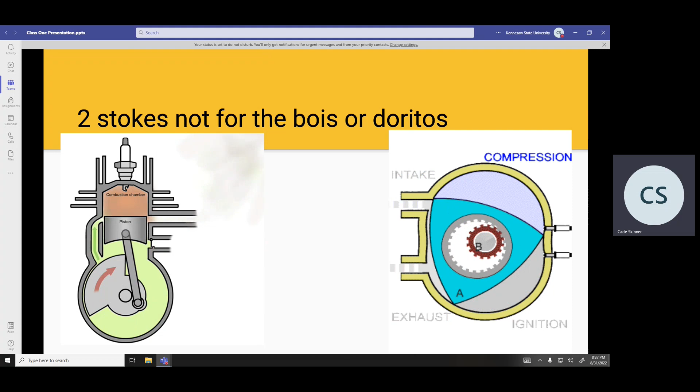They're fun, 2 strokes, they make more torque because they combust more per revolution or per cycle. So yeah, they're a little bit better. Rotaries are fun, it'd be cool to have one in the car, but tough. Apex seals are sucky. Okay, so 4-stroke motor.

I kind of listed things out from general items from the top of the engine to the bottom.

So this is like what the 4-stroke does. We can reference that again, but I'll wait for it to start at 1. So this is the first stroke. It's pulling air in, when the intake opens, it compresses, and then it combusts, sends it down, exhaust opens, and sends it out. Right? That makes sense? Okay.

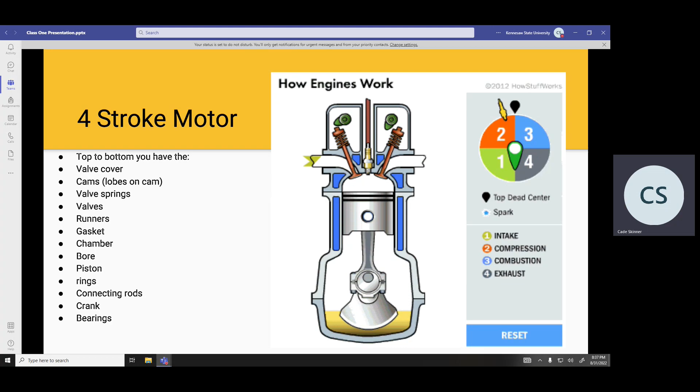So then you have all those components. I listed the slides out in that order, so we can go through all those components.

Cams, that is what opens and closes the valves, exhaust and intake, depending on how your cams are set up. On the R6 specifically, you have 2 cams, 1 for intake and 1 for exhaust. Some engines have just a single cam, LSs are famous for doing that, if you don't know about LSs. And then, yeah, ours will just have 2.

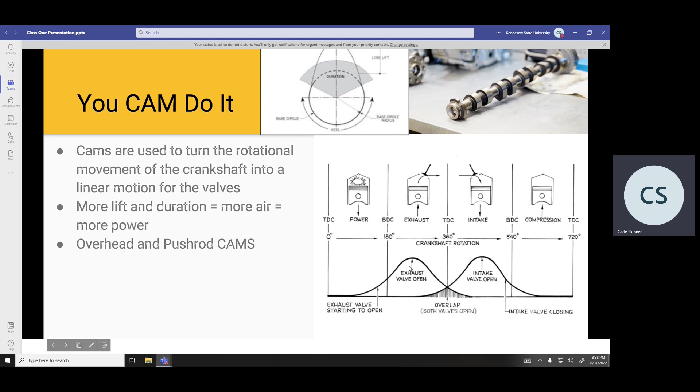Can I minimize this? That'd be sick. Okay, you can see here. So as you do a stroke, I guess I explained it: intake, compression, exhaust. I'll start here, I hope that's not confusing. But...

So you're going down and your intake valve will be open and it'll be pulling air into the system. And then as you get to the bottom of the cylinder, your intake valve will start closing, depending on your timing, and then it'll close, and then you'll start compressing when your piston starts moving up.

And then it'll combust, and then it'll send it down, and then before it gets to the bottom, it'll open your exhaust valve, and then it'll start moving up and exhaust. And then the overlap here, we'll talk about that later in another class.

That's called lobe separation angle, and we'll talk more about how you can utilize that. Actually, that might be in this class. I don't know, maybe. I tried to set the classes up from the previous, so we'll see if I put it in here. But yeah, so that's how cams work. They go to the crankshaft.

Is the motor we have in the car now an interference motor? No, it shouldn't be. If it is, that's bad. I guess I'll explain that. So with an engine, basically if you go to top dead center and you push your valve all the way down and it hits, that's interference.

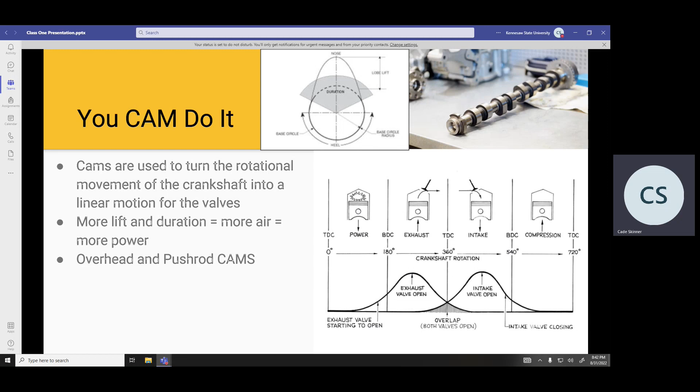Okay, so for the R6 specifically, it actually fires 1, 2, 4, 3. That's going from the clutch side to the stator side. So that's how it would do the cycle, which helps with balancing as well. That's why inline fours are insane. They're really well balanced. But yeah, I think that's all on cams. If anyone has any questions. Okay. As well, y'all can ask more at the end if you have one.

How you do what? Oh, ignition timing. Since we're tuned, we're not distributor. We just do it in software.

So the only thing you would really change your valves or your valve springs for is with a high RPM motor like the R6. With a high RPM motor like the R6, you actually can get valve float, but it is stock and revs really high, so we shouldn't see an issue with that. As well, we don't rev as high as the stock one does because we're restricted.

But yeah, if your springs aren't strong enough, your valve will actually stay open because of the force of the air getting pulled in, and the speed of the cam moving will kind of bounce your spring down, and it'll kind of stay open. So you need to get stronger springs. That's kind of it about valve springs. Sometimes they can become underdamped, I guess is the way you'd describe it if you had vibrations and controls, but y'all don't have that, so I don't know how to describe that in simple terms.

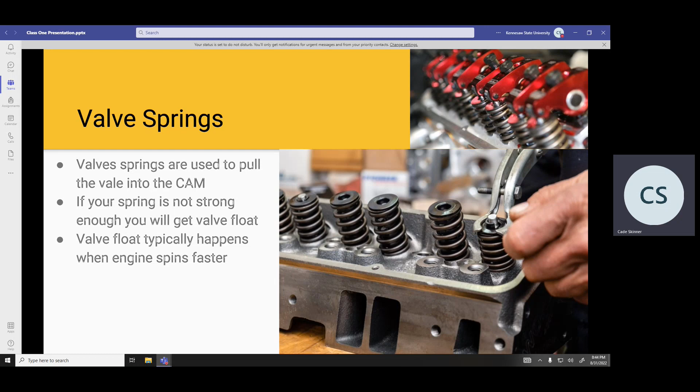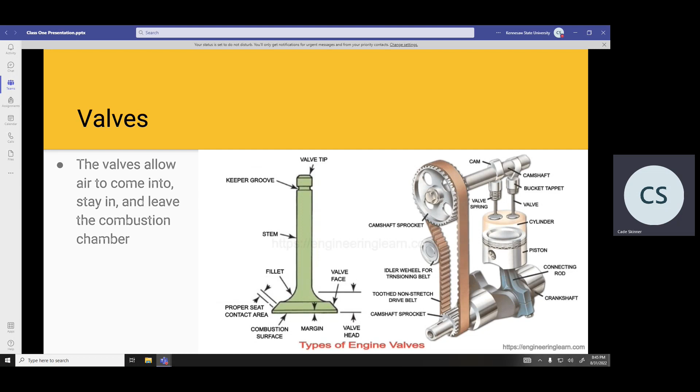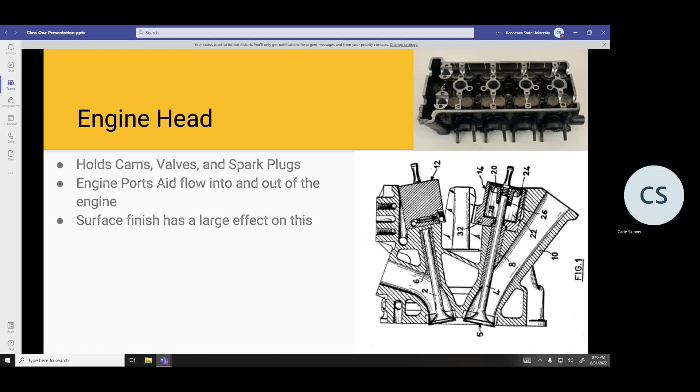Oh, your ports, sometimes you can finish them, you can get them ported is what they call it, ported and polished, and they flow better. It kind of just helps. Part of the stock. Yeah. Head gasket goes in between the head and the block. It just seals it. Make sure your coolant doesn't go in your combustion, and make sure your combustion doesn't go outside of the block. Yeah. Okay, cool.

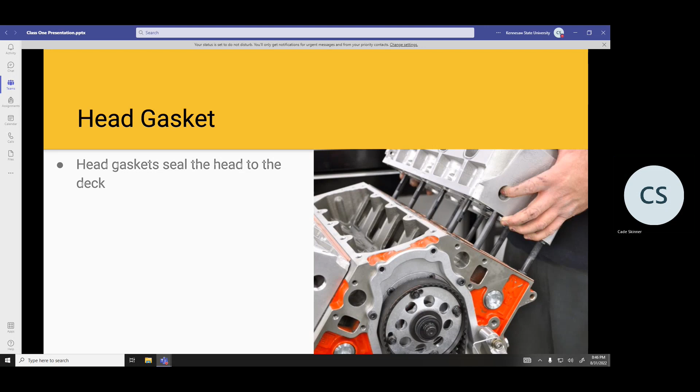Block, so it has your cylinders, or I guess I'll go in order of the slide here. So it has coolant passages and oil passages. So your coolant flows through these little holes here, and they go into the head and just kind of recirculate, and then they exit on the other side.

We'll eventually look at an engine, I assume. I don't know if we're doing that for training. Hey, Mark, for our trainings, are we going to look at an engine? Like, are we going to do an engine teardown or? Okay. All right. Well, I guess I can.

Yeah, your coolant will go through the head, and then it'll go out, exit the engine. Oh, tough. I didn't want to do that. Nice. There we go. Oil, you have all your oil passages. So, like this one, you can have oil go into the filter, and then go out into the engine. R6 is kind of cool. It's got some neat oil passages in there that you can look at. I should put some pictures in here, but it's fine. We'll see it eventually, sometime through classes or trainings.

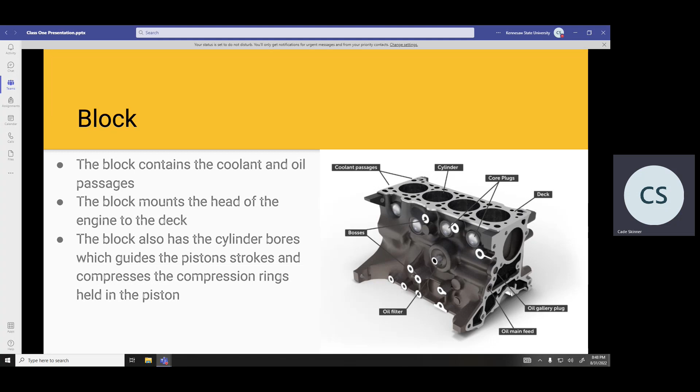And then you have your cylinders. So all of your cylinder bores. This is where your piston travels upwards and downwards. So it keeps your cylinder in there, and it compresses all your rings. So you have your compression rings. That's actually what keeps your compression from going in the block, because your cylinders aren't actually just straight, they kind of taper, so it compresses those rings as it goes towards the top, and then you have gaps in your rings and stuff. I guess if we did an engine building class, that might make more sense, but I don't think we're going to do that.

Piston, so this is the guy that moves up and down. So you have the crown, that's the very top part. So that is what is exposed to the combustion chamber. That has valve recesses, or yeah, valve reliefs like I talked about earlier. So that helps if your valve is going to be open while your piston is at the top, and makes sure it doesn't hit it.

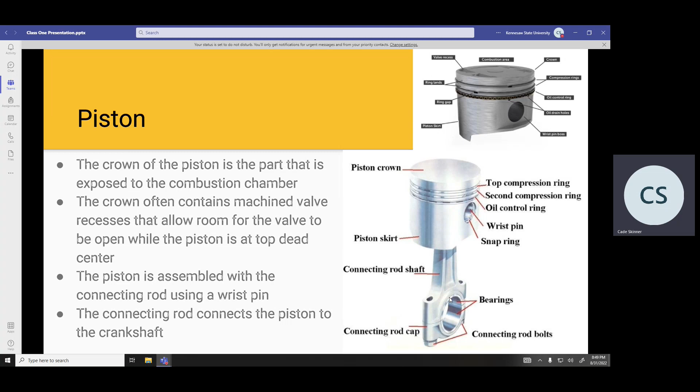And then we have your connecting rod, and that's going to be held in with a wrist pin that goes through this hole, and it has little C-clips that go in and hold it. And then your connecting rod is going to connect to your crankshaft with these little bearings in there. And then here's your crankshaft. So you can see on here that the crankshaft mounts using these ones that are kind of in the middle.

Yeah, so this is similar to the R6. You have 1, 2, 3, 4, and that's how it's actually patterned. So you have your main journals. So those are what attaches to the block, and then that thing can rotate inside of the block.

And then you have your crank pin journals, which are the ones that are kind of offset, and they have counterweights on the opposite side of them. So the connecting rods will actually connect to that, and then the counterweights actually offset the weight of the piston. Okay, does that make sense? And then that sends power to the wheels using the flywheel. Yeah, cool.

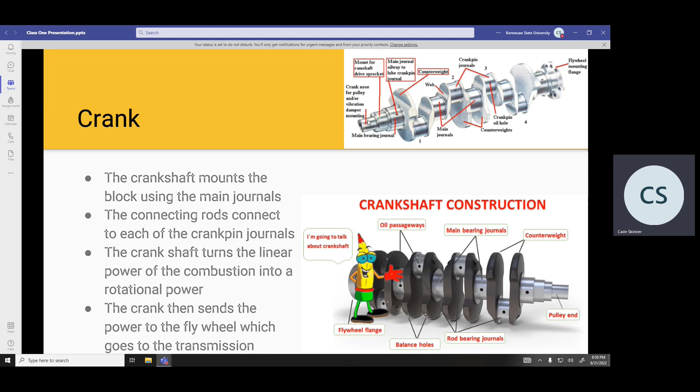Oh, also on this end here, usually you have something there to go to the cam, like a chain or a belt, something along those lines. And then displacement. So you can see how you calculate it here. If you have your stroke and your bore, it's just how you take the volume of the cylinder. It's divided by 4 because they use diameter, and 2 squared is 4. That's how you calculate displacement, and then you multiply by however many pistons you have.

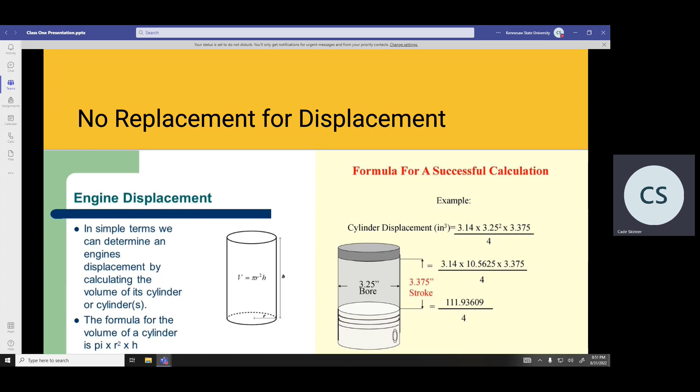Intake, throttle body. So that is what helps distribute your air to each cylinder. For our car, we have to have a 20mm restrictor in line of the intake, so it's right after our throttle body. 19mm if you use E85, and we can use forced induction. We just haven't gone down that avenue yet. If you use forced induction, are you allowed to have a larger intake?

Yeah, so what's interesting about forced induction is your restriction actually has to be before the compressor wheel. So it actually has to pull all of your air through the restrictor. So it has to be pre-turbo. It's like where your air filter goes on a turbo. If you have an air filter. Some people don't, and they're mad.

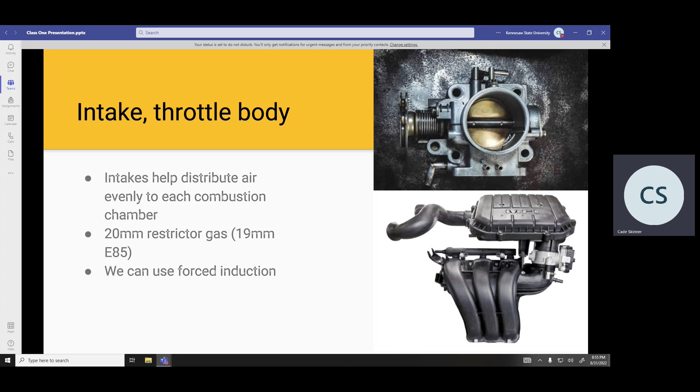Sick. All right, I'll move on.

So then you have your sensors that are in your intake. So you have your MAP, which is manifold air pressure. The MAF is mass airflow. MAP is manifold air pressure. So that actually goes inside of your intake manifold. On ours, it's kind of like that big chunky looking piece. So that would read how much pressure is inside of the plenum. So that'll tell you how much air you are able to get into the engine, and you can use that for tuning.

And then mass airflow is just another way to get that, but it's kind of better because it shows you how much is going in, not how much is there. With MAP, you just know how much is there. With MAF, it helps you be more predictive in how you tune, because if you're sitting at idle and you stomp the gas, you're going to get a massive influx of air into your intake. With MAF, you'll be able to see that and predict how your engine should react. With MAP, you won't be able to see that until it's at the manifold.

But you can use accel enrichment, which looks at TPS, which is throttle position sensor. I don't know how many of y'all have taken calculus, but it actually looks at the derivative of the position of your TPS. Derivatives are just the change of something over the change of time. So if you have a very fast change, it's like the acceleration of your TPS. Is that okay? Any questions on that?

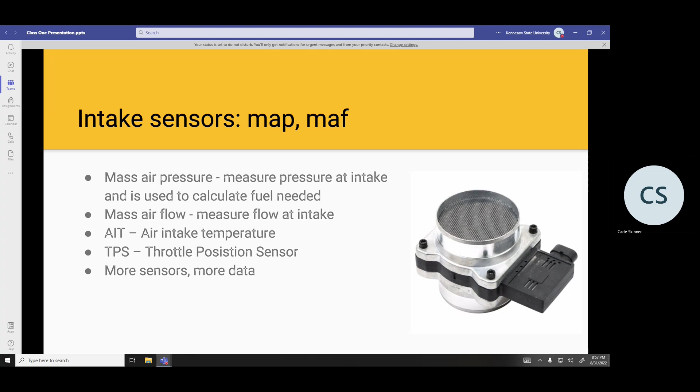Awesome. Injection. There's a couple types. There's some that do dual injection, I'll get into that. Mainly port injection, that's what we use. If we were going to use a different injection, we would use dual injection, where you have 2 injectors in your port, and that helps with your duty cycle. Right now we just use 1 port injector. For each of the intake ports, you have an injector that sprays fuel into the intake port as your intake valve is opening, so you can time those.

You can do it wasted, but then it's not going to atomize as well. If you just spray your fuel and it's just sitting there, versus spraying your fuel while your air is flowing, then it'll mix the fuel and air as it goes into the combustion chamber.

I have a question. If you wanted to change your injection type, would that require changing the block itself? It depends what you want to do. If you wanted to do direct injection, you would have to drill and tap a hole in that guy. If you just want 2 port injectors, then no, that's just in your intake runner. What injection method do we use? Port injection. Direct injection goes straight into the combustion chamber. It's better at atomizing the fuel because it doesn't have to get pulled in.

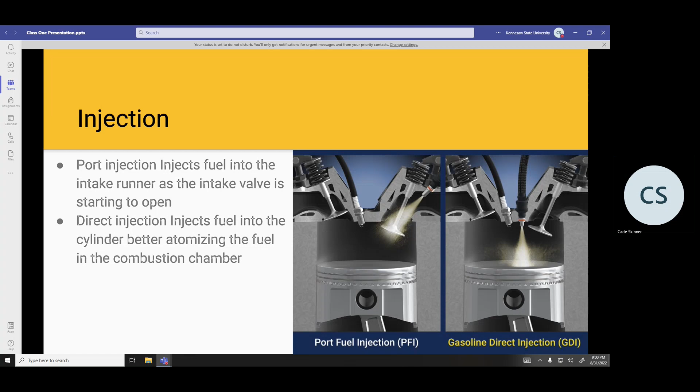All right. Okay, so for how you would time your engine, or I guess not timing, this is your trigger wheels.

So your main trigger wheel would be your crank, which you can just use a crank sensor to run your engine, but then you have to have everything wasted. So your crank wheel, all that shows you is when you get to top dead center for cylinder 1. Well, it might be different for other engines, but for the R6, the crank wheel shows you top dead center for cylinder 1. So each time it goes around, it shows you top dead center.

So it could be top dead center of exhaust, or it could be top dead center of combustion, or where it's about to start combustion, or where it's about to start intake. Yeah, depends on how you look at it. But if you just have a crank sensor, then you're gonna have to have wasted spark, and it has to spark on both of those events because it doesn't actually know which one is the combustion event.

Your crank sensor also gives you engine RPM, and then your cam sensor is better because it actually shows you when your engine is on your combustion stroke. So if you look at this one here, this blue one is your crank wheel, and it can show you when that missing, oh, I guess I didn't describe that. So the crank wheels have a bunch of teeth, yes. And then this part here can see when the teeth come by.

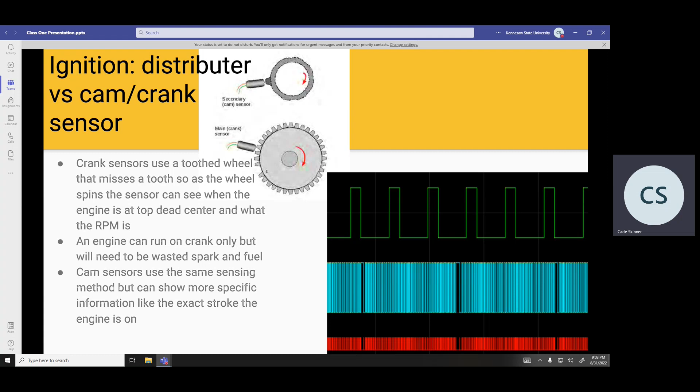But it does change as your speed changes, and we'll talk about that a little more for the next class. But little summary: basically, engine moves faster, so spark earlier because fuel takes time to combust. All right. So that's kind of how the engine knows when to fire. All right. We're good then.

O2 sensors. So this just reads air fuel mixture in the exhaust. So we mainly use it to tune right now, but you can set the ECU to use EGO correction. So it would actually look at your O2 sensor and see if there's something that is off from the target goals you have, and it would actually change itself. But right now we don't use that, and we're still within an AFR error of 1%, so that's pretty good. I don't think we need to go to that, but it could help with efficiency.

Do regulations require us to run any type of catalytic converter? No.

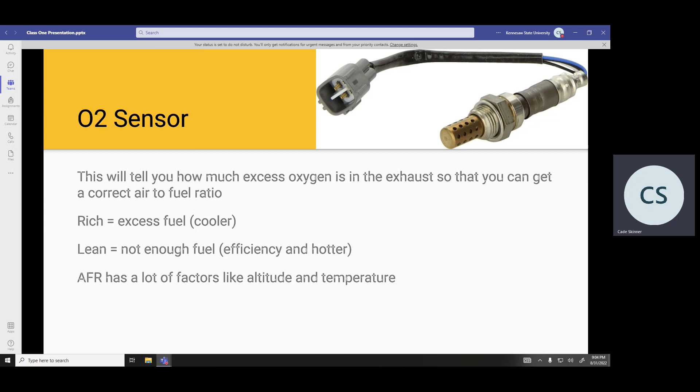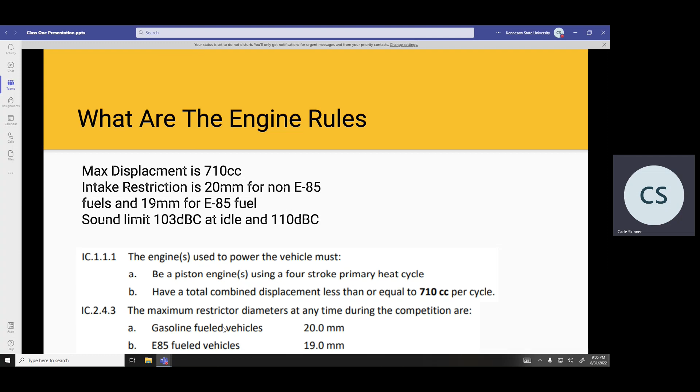So then what do we use? I said it a bunch, but here it is. It's a Yamaha R6 motor, 600 cc. There's 4 valves per cylinder, or 16 valves in total because we have 4 cylinders. It's chain for cam timing, 13.1 to 1 compression, and it's port fuel injection. And then the gearbox is actually inside. So here, that's your stator. I wish it showed the other side. Basically on the other side, you would have your flywheel, and that would turn your transmission components. And then this right here is your output shaft.

So inside of all this, you have all your gears and stuff for a trans. Are we running these stock trans? Yeah, it's sequential, it's pneumatic shifting. It's the stock trans, but it has a little solenoid that goes to the shifter. So on your bike, you'd hit it with your foot, but instead there's a pneumatic thing that hits it.

But does the driver have to clutch to change gears? No. The system we have now will actually cut spark. When it cuts spark, it unsyncs all the dogs in the trans. It's basically a bunch of things in there, and when you're driving they're touching each other. When it cuts spark, they desync and you can change gears. If they're touching, you can't change gears, so cutting spark lets you change gears. So drivers can just launch and shift without letting off, or they can pull the clutch in and hold their foot to the floor. I think it takes about half a second to shift. That's pretty quick.

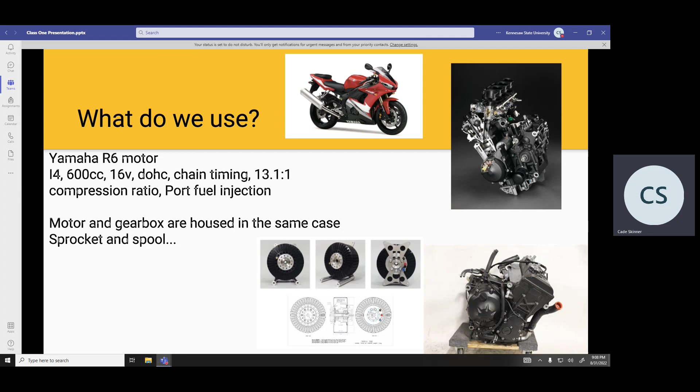Questions? If money wasn't an input into it, would lightweight internals be smart to put in? I mean, yeah. Why would that be good? He asked the question, so I figured he knew why. It'll rev faster and the overall car will weigh slightly less. As you increase your rotating mass, that takes away power from your engine, but sure, if money wasn't an option.

In the new member channel, there's a pinned message with the rules in there. Or if you go to Google or whatever browser you like, you can type Formula SAE rules 2022 and they'll probably show up. If they don't, I'll talk to Google myself.

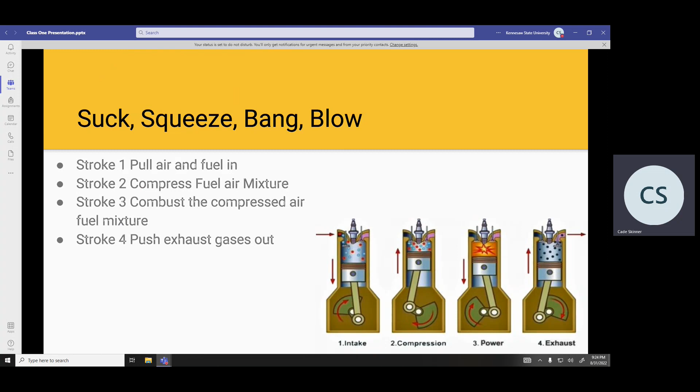That's the slide Alejandro wanted to see. This is my first slide. Oh, whoa, I can't go to that one yet.

Bruh, you just showed up? Someone ask him a question, it's gonna stump him. That's y'all's job now, because y'all are here. That's a pride question. Yeah, I would want them to come up with a question for us. Test of knowledge - if one of y'all asks him if there's any fuel restrictions, y'all can just walk out.

You got me there, guys. Oh tough, I can't ask the question. Stop. Yeah, honestly.

What's the firing order of the R6? Oh nice, I have no idea. Yeah, I have no idea. Can you explain why it is the way it is? It's the whole balance. With balance what? I didn't say that - the crankshaft.

Oh yeah, I didn't think about that. That's the biggest one for running real lean. If you fire in just a linear order, you're gonna end up putting a shitload of heat in the center two walls.

Yeah, I was gonna relay it back to power command. Earlier in the PowerPoint, you said we were restricted in our RPMs - what are we restricted to? Well, you can go as high as you want until you blow your motor up. We restrict RPMs by our series rules. What are we restricted to? We have our RPM set to 14,000, and the bike runs to 13.5, or 17.5, my bad.

Any more questions? I'm just impressed. Is it too much information? Is it too little? I tried to make it fair. Do y'all feel like y'all learned too much or not enough? The right amount, I think. We could have fit more drivetrain in this presentation probably. Yeah, I probably should have.

It's a little late. Dog, I haven't even had my NOS yet.

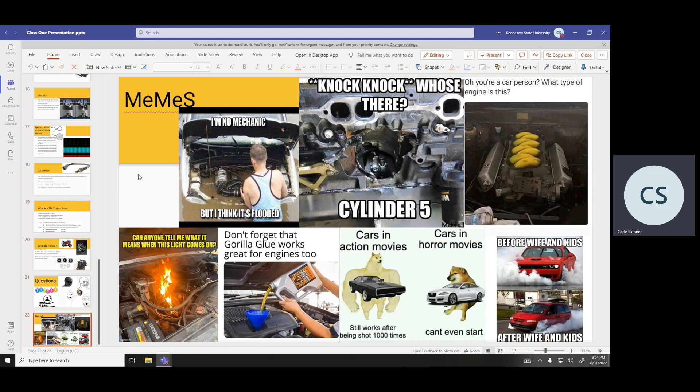No. I'm a lone wolf dog. I was trying to give those teacher vibes. I don't drink enough. I don't get to speak. I get to speak over like 3 seconds. Game over, but that's fine.

Yeah, the only reason why I asked if it was an interference motor is because I have some type of bad juju with interference motors. Every single interference motor I've had has blown. Just on a normal drive, going to the bank, GTI, EA888, timing belt just failed and the cylinder and valve decided to kiss and the engine went boom.